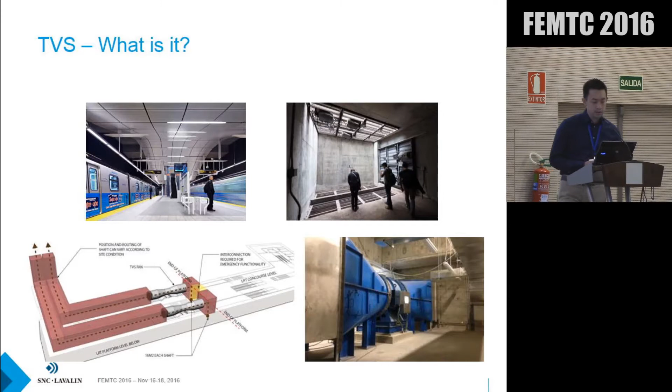So for people that may not be familiar with what a TVS or tunnel ventilation system is, essentially it's a network of fans and dampers that we will install in underground transit systems to help in emergency situations to make sure that we can maintain tenability for evacuating passengers. These are big pieces of equipment, and essentially what we'll do is we'll take a holistic approach, kind of a cradle-to-grave design, and apologize if it's hard to see.

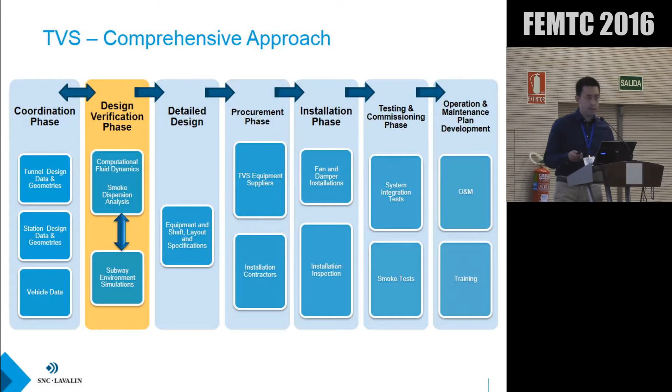After that, we'll carry through to the detailed design, procurement, installation, testing and commissioning, and then finally hand over to the client and customer. For the underground station analysis that we do, the testing and commissioning phase is a great chance for us to validate our model. We'll have the chance to run the systems, measure airflows, look at different scenarios, but we'll talk a little bit more about that later.

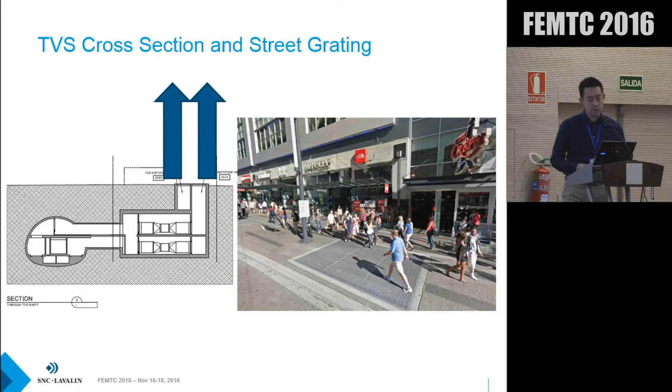So here we just have a cross-section of a typical TVS system. On the left-hand side is where you have the trains running, and on the right you have your fans, your fan assemblies. Now, obviously with light rail transit, a lot of the stations run in very dense urban areas, and we'll need to terminate the smoke discharge grates at grade level. We're not in a process facility where we can simply vent it up high. That would solve all our problems. So there's a lot of consideration that needs to be had during these designs.

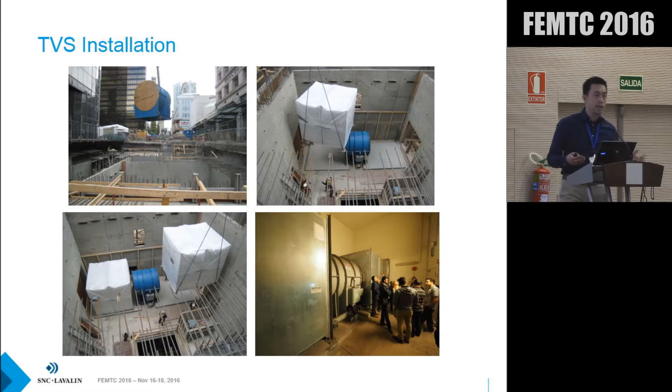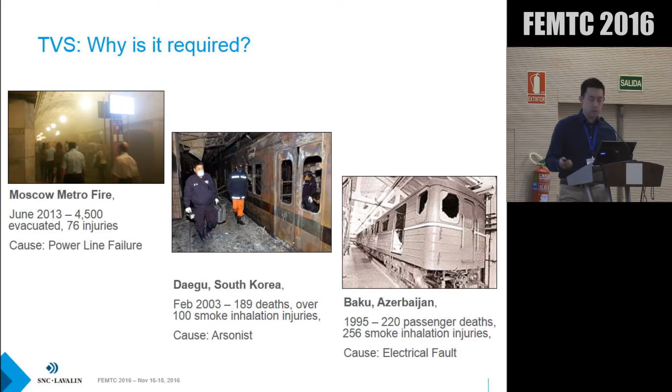And I read a quote saying that in these 2 incidents in South Korea and Azerbaijan combined, more people have died than in all other road tunnel fires combined in history, which I thought was very interesting. So while people may think it's rare, in the off chance that disasters do happen, the consequences are very large.

So going on with the TVS design, typically we'll branch off into 2 methods. The first one, on the bottom here, is SES, which stands for Subway Environmental Simulation. It's a very well-respected one-dimensional analysis software used to analyze the tunnels for the 99.9% where there is no emergency. So normal modes, different temperature modes, and maintenance modes.

And it's very useful because for the station fire analysis, SES can provide us with boundary conditions. And we'll go on with a CFD analysis, and we'll take these boundary conditions and look at station fires, even with trash cans, and also with trains being on fire. The talk today will be more about the smoke dispersion analysis, which I'll get to.

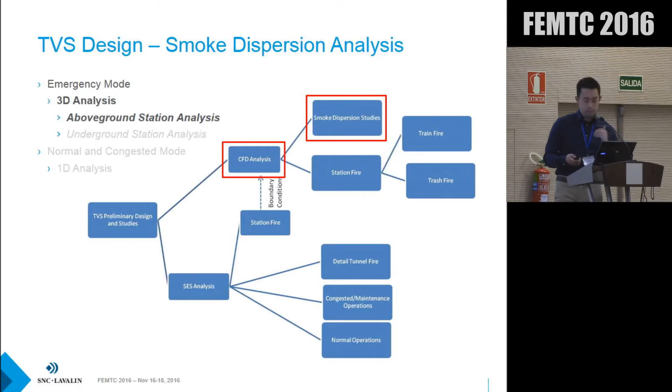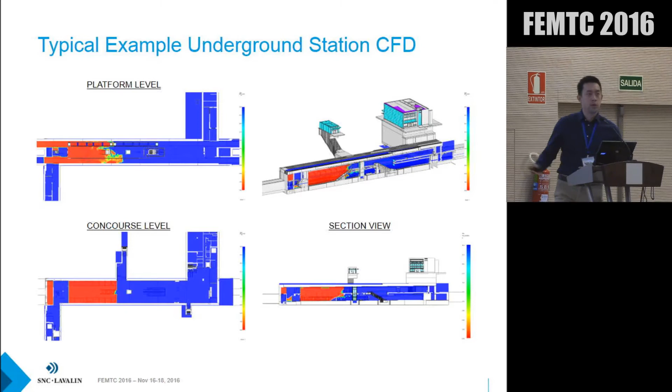And previously in the past, clients have been satisfied with this, but we realize these days clients kind of want to know more. What happens to the smoke afterwards? And there can be effects. So after the smoke has discharged to grade, you can see that depending on wind conditions, there can be an adverse effect to that smoke. And it can affect emergency responders, nearby businesses, even the people that are evacuating.

And that's our biggest interest because we don't want to have a short circuit of smoke. And it would be a big irony to see the smoke go back into your station entrances when your TVS was designed to protect the people evacuating.

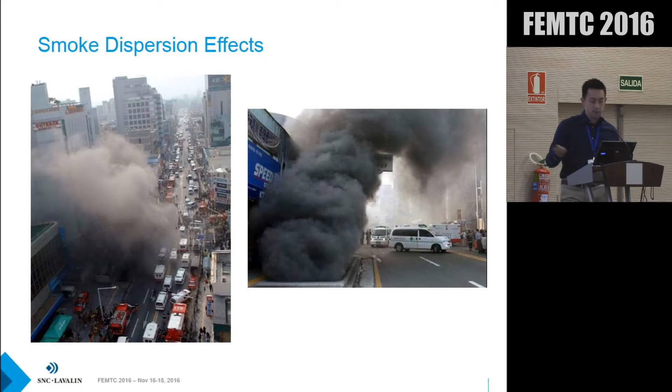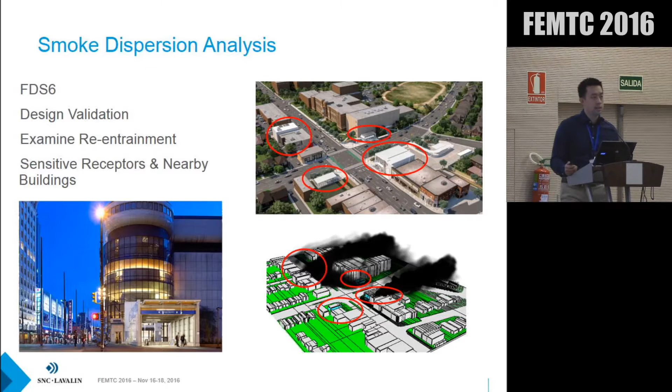So we use FDS6 for our design validation, and primarily we're mostly interested in re-entrainment. And also as a bonus, we'll look at nearby sensitive buildings, we'll call sensitive receptors. And it's a very useful tool for us. So over on the left-hand side, you can see a station entrance here. It's a big opening, and during an emergency mode, you'd be intaking a large amount of air because that's what the TVS fans will be pulling from.

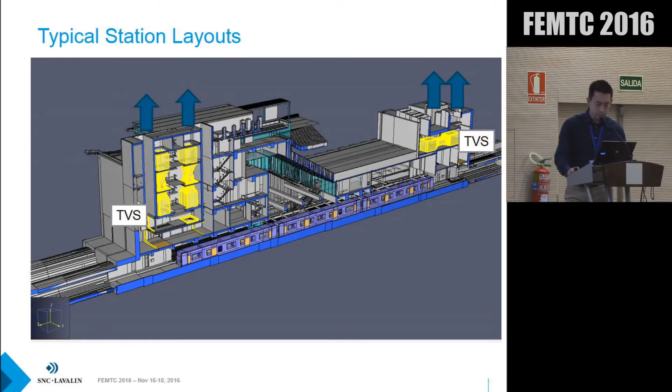Just another typical TVS station layout. So I picked this slide because we have both the fans in a vertical and a horizontal configuration, and it's missing a fourth fan on the right side, kind of behind. But the point of this slide is to illustrate that oftentimes the architects will be working within very tight constraints, for example, the boundaries and the spaces they're allowed to have. So we have to do a lot of analysis to make sure that we can accommodate the size of the equipment along with how well it functions in emergency conditions.

So talking about smoke temperature calculations as one of the parameters for our analysis, we want to always look at the most conservative scenario because there's a lot of uncertainty that can happen in these analyses. So, for example, in a project of, let's say, 12 underground stations, we'll want to pick the station that has the tallest vent shaft where the smoke will experience the most cooling. And then we'll apply the smoke temperature value across all our simulations to be the most conservative.

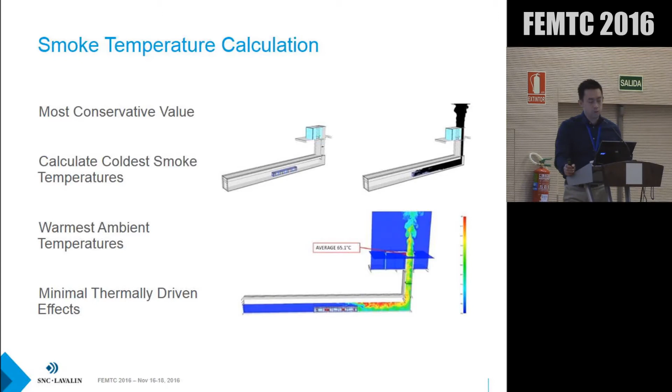And we want this cold smoke to try and create conditions where the smoke could possibly linger as opposed to, you can imagine if there was no wind, the vents would simply rise up straight and there would be no risks. We want to minimize the thermal effects during an emergency.

For the concentration of discharge smoke, again, we also want to go conservative. So what we'll do is we'll assume that the smoke one train on fire generates will be completely evacuated by only one set of fans on one side. In reality, that would be split amongst the two pairs, but we can take advantage of this by running both vents in tandem. And since simulation time is very precious, this can help save time.

So if we can illustrate that, on the right-hand side, you can see that the two pairs of vents don't interfere with each other. We can run them both at the same time. The one on the left, you can see that may not be a correct analysis because the smoke will be overlapping with each other.

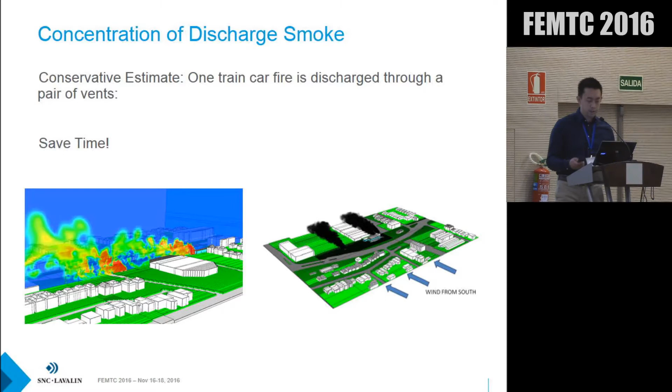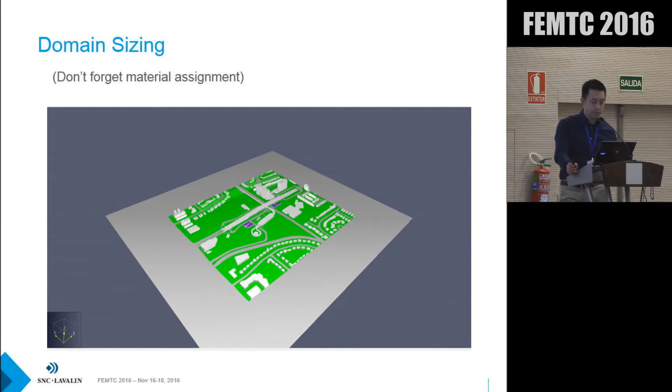So typically for the domain sizing, in North America, we'd like to say go big or go home. The reason for this is you want to model the biggest domain that you can afford. And this is so that you can capture the effects of the nearby buildings as accurately as possible. I mean, these types of analysis, there's a lot of uncertainty, but we want to be as realistic as we can. And I'll talk a little bit more about boundary conditions later. And the three buildings in the middle with the purple roofs, those would be, for example, the proposed station entrances.

So for guidance on wind speeds and directions, we can look to ASHRAE, which suggests the most onerous case of 1% wind probability. That translates to about 88 hours a year. And there's a lot of wind data being collected all over the world. You can look at a wind rose for examples of what the expected airspeeds will be. And we can translate this all into a logarithmic wind profile and apply that to our model in FDS.

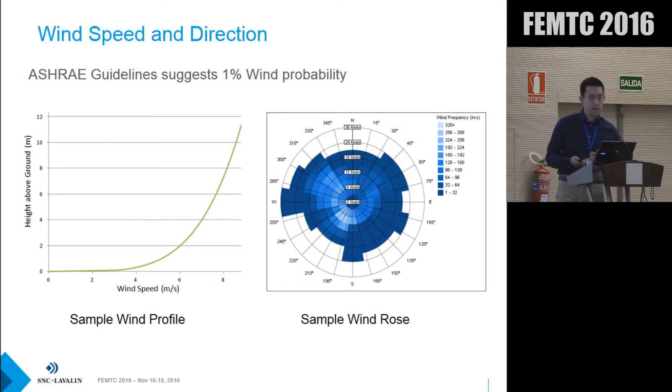Now, as for the wind directions to run, obviously there's 360 degrees. There's lots of different cases that we could be running. If you imagine a project with 12 stations, that's a lot of cases to be run. And with these domain sizes being so large, you can be looking at 20 million mesh cells or more, which could take a significant amount of processing time.

So to narrow it down, we can take advantage of something called the street canyon effect. And typically stations will run along major streets, and we can simply just look at 4 directions aligned with the major streets. And you have to use a little bit of common sense. So if a particular design could be a risk, let's say on a northeast scenario, then obviously we'll run a special case for that too. The point is we can save a lot of time, not by running 360 degrees of simulations, but you really have to use engineering judgment on selecting the number of scenarios.

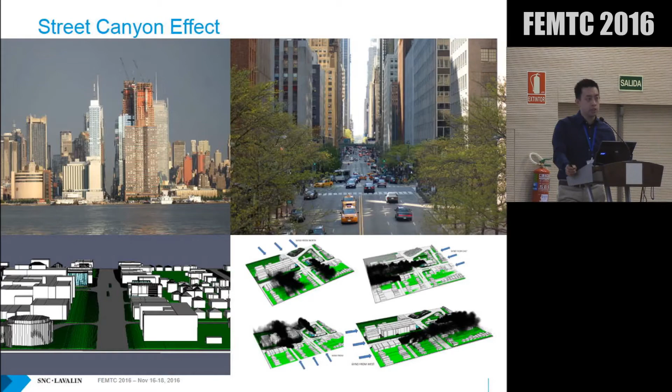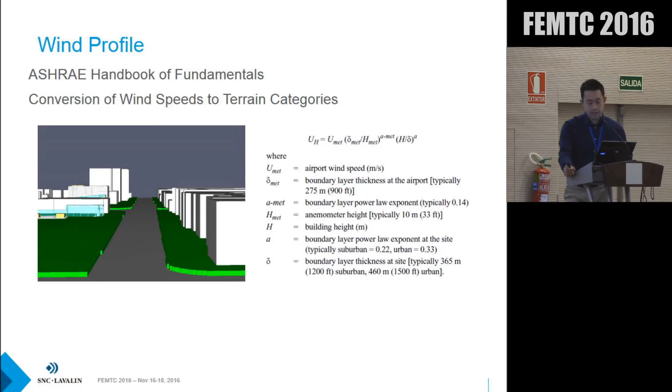For the wind profile, ASHRAE also has some more guidance on taking airport wind data in major metropolitan areas, and you can translate it to urban or different suburban areas with a different power law exponent. And so you can look up this data on the internet for pretty much every major city in the world, and you can apply it to your analysis.

So let's talk a little bit about wind boundary conditions. This is a very interesting portion because if you don't get this right, your simulation will be way off, and we don't want that. So luckily, there's been a lot of academic research in this field that seems to suggest that you want to have at least 5h in front of your domain, where h is the height of your tallest building. This is to allow the boundary conditions to develop your wind profile appropriately. And then after your model, you want to have a domain of 15h or more, and that allows for proper turbulent wake regeneration.

Height-wise is also a major consideration. So for example, in the simulation on the top right here, with just a 32-meter height, you can see that's totally incorrect. You can see a lot of momentum dissipation off the ceiling, which is incorrect. If you were to cap off that ceiling, you'd have an artificial acceleration of flow over your building, which is also incorrect. So we want to have at least 5h or more of height space.

Typically for the sides of the model that run parallel with the wind, you want to have a mirror condition, to avoid any kind of momentum losses out the sides. And then for the ceiling, we like to use a free slip condition to maintain the wind profile correctly.

As for turbulence models, I'll touch a little bit on it. I don't want to open that can of worms of which turbulence model is the best. But FDS uses LES, and I believe the turbulence viscosity model is Deardorff. In the previous versions, it was Smagorinsky. Fortunately for us, in the academic world, there seems to be some research suggesting that LES is good for this type of analysis. If you feel very strongly against that, come find me at lunchtime and we can have further discussion.

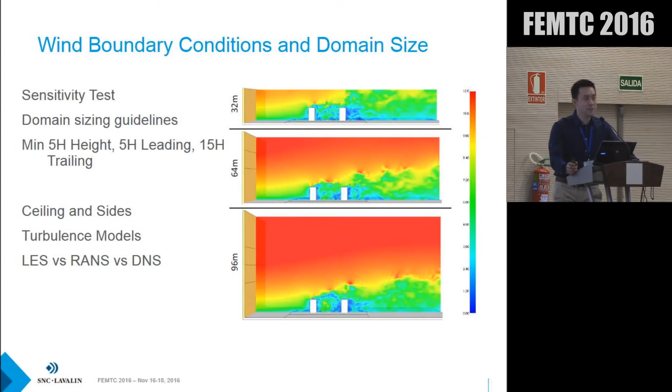For run times, typically we'll want to run the wind through the entire domain for several hundred seconds, just so that we have a stable wind flow. What we did find, though, is you can get a very quick analysis by looking at the wind even before it leaves the domain to get an idea if your design will pass or fail. You can get a very quick snapshot of what might happen. Then you can communicate to the architect saying, our preliminary analysis might show that this may not work, I'll let you know in a few days what the final result is. This way we can get communication to the architects as quickly as possible.

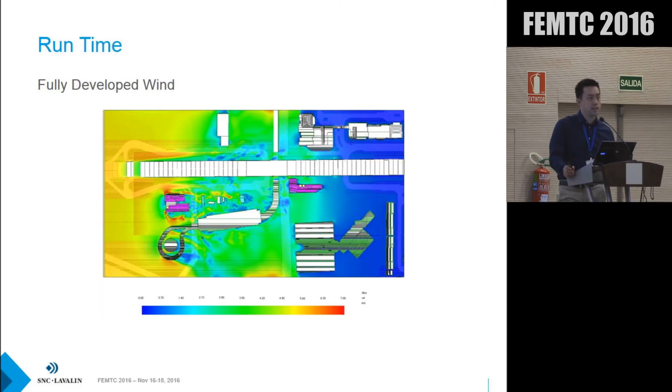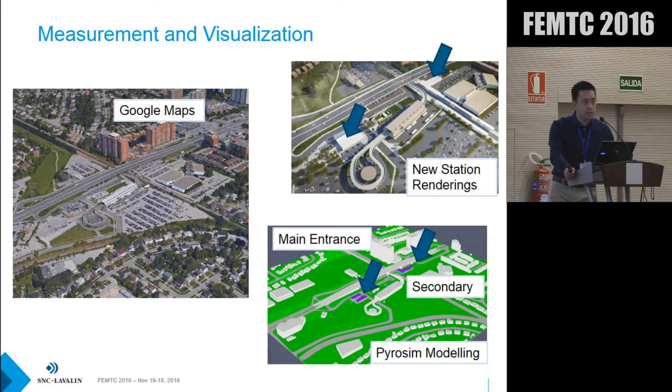So for measurement and visualization, again, we'll use a combination of data that you can find, if you're lucky, for the particular city of interest. Sometimes you have to fill in the blanks, so you'll need to use Google Maps, which is an invaluable resource, Street View, for example, and measuring out distances. Sometimes you have to draw the CAD in manually yourself. And of course, tools like PyroSim are very helpful for us because these FDS files can be hundreds of thousands of lines of code. You wouldn't want to be typing that manually.

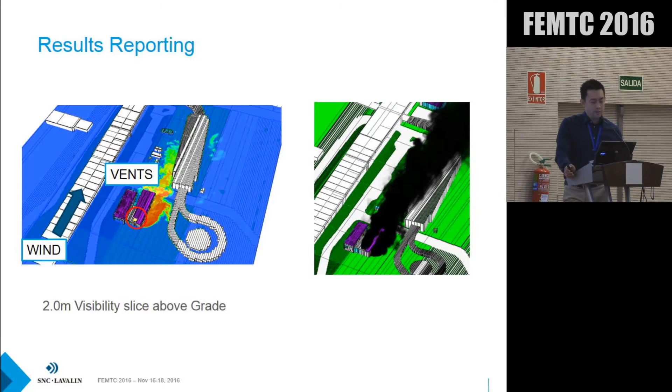Now, for results reporting, typically guidelines like NFPA 130 Appendix B provide very good guidance on looking at visibility. For example, for this particular run, the architect was proposing that one of the vents be on the side of the building, and from the visibility slice, you can see that it adversely affects a nearby station. We can report whatever we like, but what we find very useful for clients is appropriate visualization. So we can use isosurfaces to represent, in this case, our carbon monoxide criteria. You can set your carbon monoxide to the level of interest.

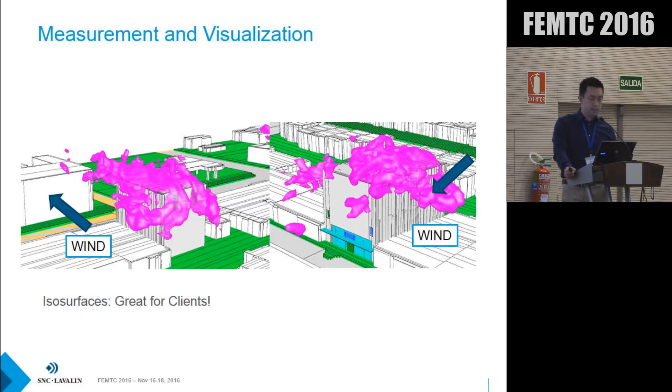For example, here we have our smoke vents. The proposed design was going on the back of the building, and the architects want to know, would that affect the front station entrances? So this would be our front entrance or louvers, and then also some HVAC intakes. By running this wind case with the isosurface, since often you have to present this material to non-technical people or people that don't understand FDS, this creates a very powerful way for us to interact with our clients.

So risk mitigation, what do we do with all this data? The most obvious thing that we can do is look at different vent relocations, adjusting the height. In the case that we can't do any changes to the vent locations, and there could be lots of reasons for that, we can look at perhaps different types of louvers or door intakes that could close during emergency situations while they would remain open during normal operating conditions.

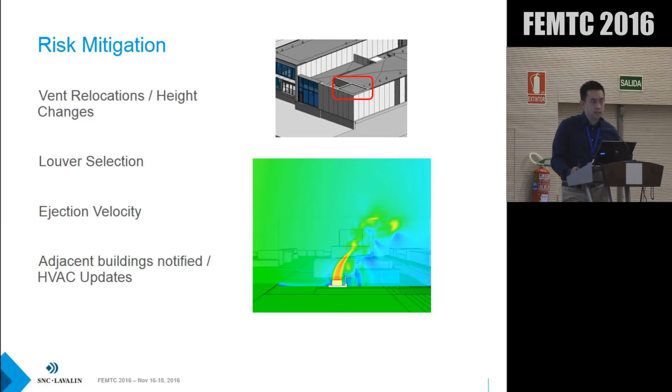And then lastly, we'll get everyone involved, the city officials or nearby building owners, to let them know that there could be a risk during a fire emergency. And then they can look at whether they need to update their procedures, or maybe if their HVAC intake doesn't have a carbon monoxide sensor, that they could install one, things like that.

So outlook in the future, this is what do I have to do when I get back to my office, which is just full of computers. Now, like I said earlier, there's a lot of uncertainties with these kinds of analysis. For example, we're not capturing large foliage like trees or vehicles. Maybe we could look at Lagrangian particles and drag coefficients to address those kinds of things.

But a major concern for me is looking at mesh resolutions and computing power. For example, if you look at combining these runs with an underground together with the above ground run, you can do everything at once. But then you're looking at models that are in excess of 40 million or 50 million mesh cells, and the computing power is just not there yet.

So for sure, I'll definitely try to keep updated on any kind of large-scale wind validations, particularly in applications in FDS. That would be very interesting, and perhaps look at future applications of where this could be applied. It could be maybe pollution modeling, et cetera.

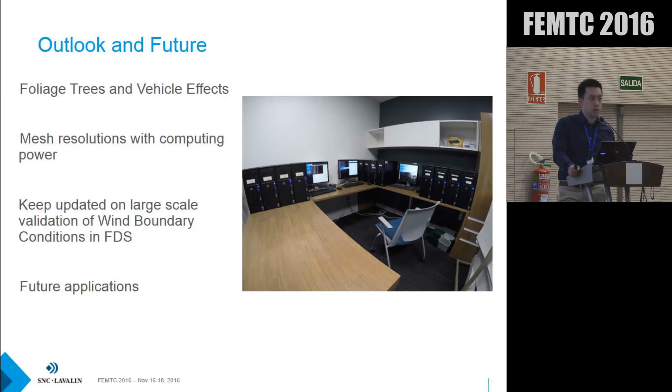So thanks for your time. This is just a picture of underground station fire verification. We'll test our TVS system, and then hopefully one day in the future we can do the same for above ground modeling. Yep, thank you. Thank you.

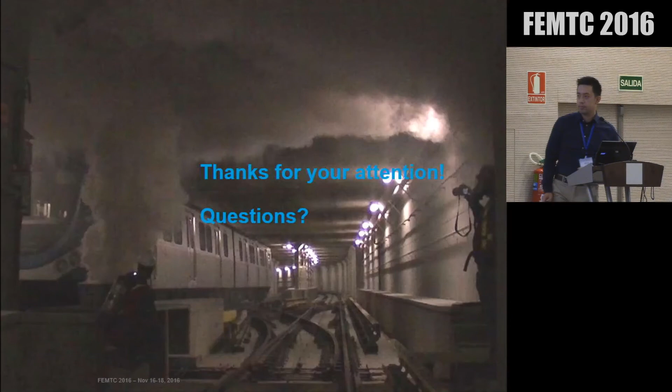Do we have questions in the audience? Yes. Can you please give me an idea what was the maximum cell size used for your model? Maximum cell size? Oh yes, I should have touched on that. Typically in the areas of interest, such as around the station entrances and the smoke vent areas, we'll use maybe 0.2 meters. And for example, regions like 50, 80, 100 meters up in the sky, we can use a cell size of maybe 1.6 meters. But in the areas of interest, it'll be about 20 centimeters.

Lovely. So your domain is quite big actually to achieve 1.6 meter maximum cell size. That requires maybe much more than 20 million. Yeah, so like the image I showed earlier, the domain size is about 20 million or more. So these runs get huge very quick. So that's something I'm always interested in, trying to optimize these runs, find ways to run them faster, and look at more computing resources.

Hello, that was really good. I'm really impressed with you using computational wind engineering. I'm going to have a talk on this tomorrow as well. But what was interesting for me is how do you choose acceptance criteria for the critical buildings? Because obviously the temperature will not be there, there will be some smoke, but what kind of criteria do you choose to say that this is not valid and this is valid?